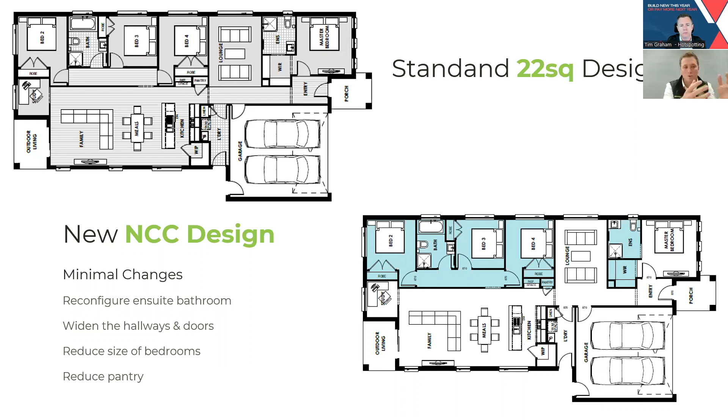To get back to the point, for a standard 22 square design there's not a huge amount of change. The biggest change is when you come into the smaller designs. This is one of Hermitage's best-selling designs for a price point - when people are looking to maximize their yield, this is our 17 square home, called Gamma 17. It fits on a relatively small and compact block, which means the land price is cheaper again, and you get great yields with a 4-bedroom, 2-bath, 2-car option.

For this particular design, there's nearly no way that in its current form we can meet the accessibility standards. If you can see my mouse here, we'd have to widen this door. This hallway we'd have to widen again, which would mean the walk-in wardrobe gets smaller and smaller. From an ensuite point of view, we're not sure if we can reconfigure that to meet accessibility standards. And likewise in here, we have to be 1.2 meters from the toilet - this door obviously isn't 1.2 meters, and there's not 1.2 meters of clearance in that toilet there.

But as block sizes continue to get smaller, this is going to become a hell of a lot more difficult. 100%, Tim. And that gets down to the major point - from an affordability standpoint, with borrowing capacities the way they currently are, interest rates being high, and land and build pricing going up, it's going to get very difficult. Even if you look at smaller homes on an 8.5 by 21 as an example, it's going to be extremely difficult to get 3 bedrooms on there - not impossible, but difficult. There will have to be design elements and changes to make sure we're able to get either the best yield, the best house, the best capital growth, or the best livability spaces for everybody.

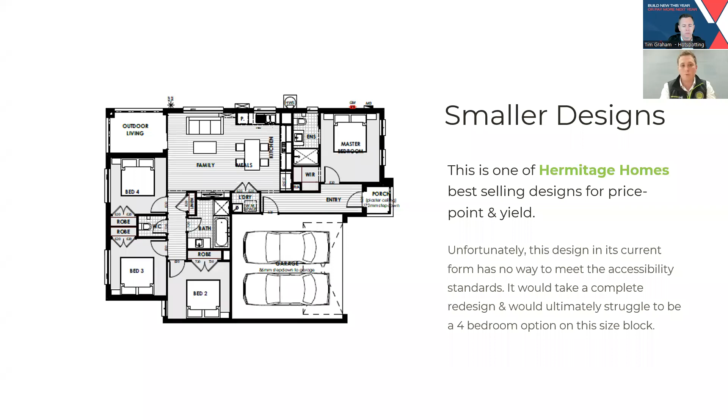There are going to have to be some design changes, whether that means builders have to reduce the amount of builds they go ahead with. We've got a catalogue of around 40 different designs that people can select - we'll be reducing that, because there will just be some designs we won't be able to proceed with in the market based on these things coming in.

So as you said, there are 2 components of it - the accessibility standard, and the 7-star energy rating. I know within our team here at Hermitage, the drafting team isn't overly worried about accessibility - it's definitely one component, but the 7-star energy ratings are giving us the biggest nightmares internally. The major component of change is the 7-star energy rating - to achieve that we have to hit 7 stars on the NatHERS, which is essentially based on reducing carbon emissions. I'll go through a couple of other things, but I'll come back to that.

The whole of home energy rating is something we also have to comply to - this is like an add-on or bolt-on to the NatHERS. The whole of home is a separate rating to NatHERS and goes through the appliances, the lighting, if you've got a swimming pool and a pump, or a number of different things. Where the NatHERS is about reducing carbon emissions from heaters or air conditioners, the whole of home is trying to offset that by making sure all the appliances and everything like that bring that rating down. But you have to comply with both of those, and then conduct thermal bridging testing.

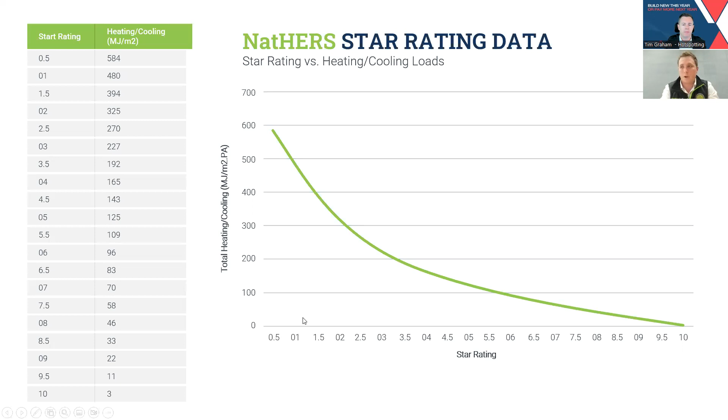To go through a bit more of that - what we have here is another thing coming into play that every builder is going to have to do, whether you're a financial planning group working with Hermitage already, wanting to work with Hermitage, or an owner-occupier trying to get a home - selecting your lot is now going to become more important, whether it's for orientation reasons like north or east facing lots, or whatever reason. Selecting any particular lot will affect the 7-star energy ratings, because we have to make sure it complies for each particular lot and location, where the shading's going to be, where the sunlight's going to come in, and a number of other things. So selecting your lot is going to be one of the most important things for anyone.

So it goes to say this is going to have a backflow effect all the way back to the property developers in the way they're designing and selling their blocks, you'd imagine.

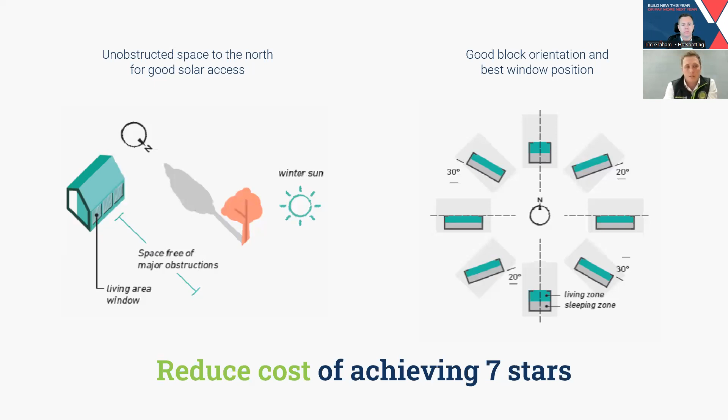And if all components of the NCC changes come in, it's going to have a huge effect on land developers, because if there's going to be a limited amount of homes that can fit on an 8.5 by 21 block as an example, what are they going to do with those blocks? If a lot is facing south and negatively affected by the 7-star energy rating, how are we going to work with that? These are all discussions we as a team are having internally, and I'm sure every builder across the nation is discussing this. Selecting the lot is definitely on every builder's mind.

So this is just a typical design. I've just ripped this off, it's not a Hermitage one or anything like that. It's just a design to go through the typical house design, and we'll go through some of the changes later. But to give you an idea of the 7-star energy rating, this is a typical house. You've got R4 ceiling insulation, R2.5 batt insulation around the house, single glazing and a concrete slab.

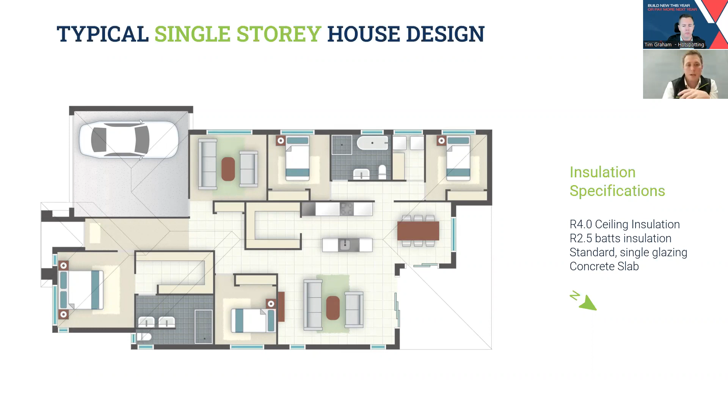When we go through the changes, this is the type of energy report that we're getting before we're getting to site. So it's important to note that before we can get a building permit, we have to comply with the energy standards, and we have to get those standards ticked off before we get our building permit.

But as you can see here, the dwelling's too cold within the entry and in the kitchen and meals areas. So from a design point of view we have to go, okay, how do we get airflow into those areas? How can the heating and cooling be distributed? How are we then going to be able to change the window setup in our designs, and a number of different things to try and bring all of that down.

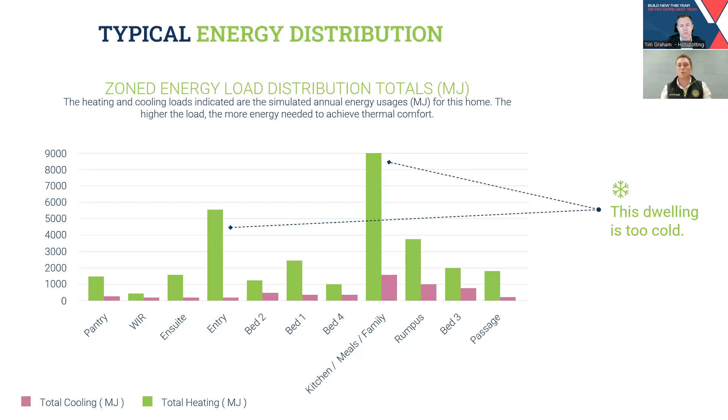So it seems like we're going to that real extra step of making sure that we're not trying to use the heater and the air conditioner and those type of things to heat the home. We're trying to make it as evenly distributed as possible, which is a big factor of it.

So going into this side, as I said, these are the areas that were highlighted. The free flow of conditioned air is being wasted in this particular area. In the entry area, this increases the overall volume of air needed to be heated and cooled throughout the home. And in that kitchen area, covered northern aspect and glazing is stopping the winter sun from warming the home. There's an outdoor area within this section, and whether the eaves have to be smaller to be able to get the sunlight in, and those types of things.

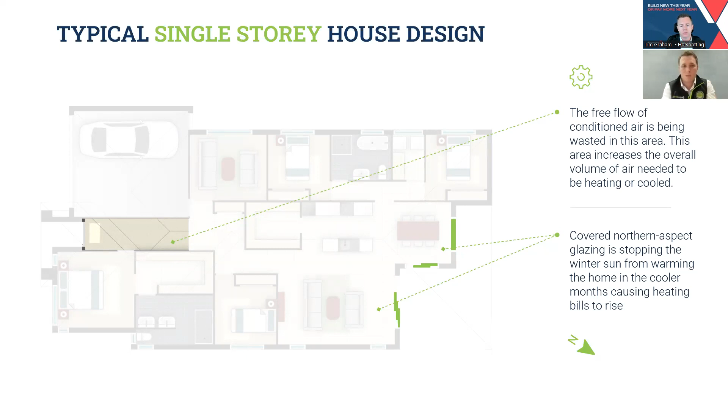So there are compromises that people are going to have to make along the design process journey to be able to comply with the 7-star rating. These are all different factors coming into play. So from the point of view of what you need to be doing, what are the 3 main things we need to be looking at to improve the overall performance of every particular home?

Insulation is going to be one thing, but that costs money. With a typical home you may have R4 batts within the ceiling, you may have to go to R6, R7 or something like that. All of these things have an additional cost. Same within the walls, you may have to go from 2.5 to 4 to 5, whatever it is, depending on the design, how it's situated within the block, and the orientation. All of those things then come into play.

Glazing is going to be a big one, and obviously the most costly when it comes down to that. If you're having to go down the double glazing path to meet these standards, it's going to cost a significant amount of money to double glaze your house. If you're an investor with a small home it's going to cost you a significant amount. But if you're someone looking to build a 45, or our Burton 40 as an example, a fantastic double-story design, there's going to be a massive cost going to windows in that.

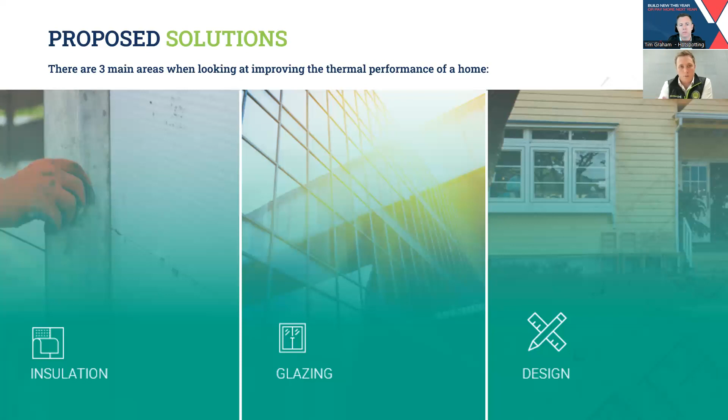The reason we're touching on this, which was sent out on all the email campaigns and LinkedIn stuff, is the final overview of why you should be buying now versus in 12 months. Pricing is probably the number one thing. So going through the accessibility standards and the 7-star energy rating, depending on your orientation and all the different factors, you could have a $30,000, $40,000, $50,000 increase depending on the design of the house and a number of other things. There's significant costs.

If you're an investor, which is what the Hermitage market deals a fair bit with - we're about 70% investor and 30% owner occupier - maximizing your yield matters. As we went through before with the Gamma 17, there's huge potential that without a massive amount of work we might not be able to get a 4-bedroom on a 12.5 by 25 block anymore. It may be a 3-bedroom, and what that's going to do from a rental yield point of view is hit your rental yield.

Your design and lot restrictions are going to be very restrictive when picking lots, and it's something you'll have to work through, not just with the builder, but also if you're an owner-occupier going to a land sales office, whether that's in Hermitage's estates, in Springridge Estate in Wallan, or Skylark in Melton South.

Great plug, great plug there.